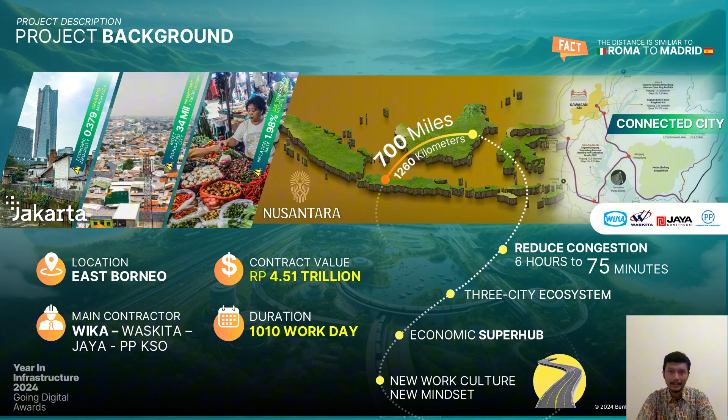This project is not only a construction effort, but also a powerful symbol of Indonesia's unity and commitment to sustainable development. The 3B toll road segment presents both significant challenge and unique opportunity within our unit price contract project.

As global warming intensifies, heavy rainfall poses a substantial risk of slope landslide, particularly in areas with soft soil properties. Additionally, our project must carefully navigate around 10 critical transmission towers along the corridor, ensuring uninterrupted power supply and operational safety.

Furthermore, the segment includes 2 dedicated wildlife corridors designed to facilitate the safe passage of endangered species such as orangutans, monkeys, and proboscis monkeys. This underscores WIKA's unwavering commitment to preserving local biodiversity and fostering an eco-friendly transportation infrastructure.

Former President Joko Widodo emphasized the urgency of achieving commissioning readiness 2 months ahead of schedule, ensuring the infrastructure was prepared for Indonesia's Independence Day celebration in August last year.

This momentous occasion marked the beginning of the initial transfer to Nusantara, involving the completion of critical infrastructure to support the new capital vision of sustainability.

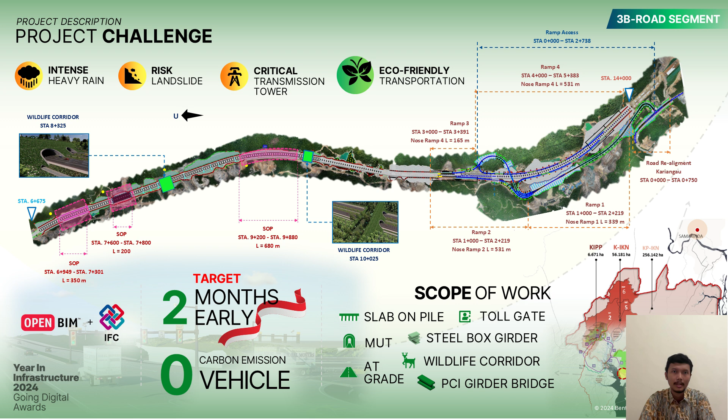Notably, Nusantara is set to be a fossil fuel-free zone, reinforcing Indonesia's pledge to environmental stewardship. This project stands as a beacon of technological advancement and sustainability, paving the way for the next 2 decades toward Indonesia's Golden Vision 2045, which will commemorate a century of independence with a future-ready smart capital.

At the beginning of development, the task force used past authority tools such as closed BIM and CDE hub for all Nusantara work packages. However, the solution is deemed insufficient in achieving Nusantara's vision in the future.

Therefore, we realized that we need an open BIM and digital twin solution to overcome the significant challenge and gain advantage on a definitive solution. So in late 2022...

WIKA identified a key opportunity to use Bentley Open BIM Solution to help resolve this issue and accelerate this project by 2 months ahead, to June 2024.

WIKA initiated an Open BIM strategy to present a solution based on maximizing the strength and specialty of different BIM tools in the smartest way possible.

One notable example, OpenBridge was used to model the full elevated intersection due to being the only efficient bridge parametric solution.

So WIKA encouraged the task force and joint operational team to work based on quality using an IFC standard, as long as it fulfills the project target while maximizing the benefit.

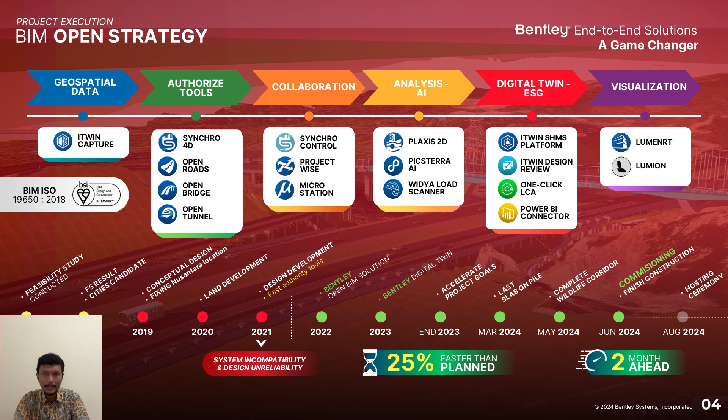The Open BIM methodology supports transparent, open cooperation of all project participants regardless of the software. The digital twins are crucial for accurately reflecting real-world conditions, whether during construction or post-operation maintenance.

For instance, iTwin Capture Modeler was used to process 500 hectares of aerial survey from UAV imagery with LiDAR sensor to speed up volume measurement, giving valuable data for design review and to perform cut and fill operations.

OpenRoads has an industrially accepted method for assessing risk of aquaplaning on longitudinal gradient in the 3B section and roundabout in the national axis, which has some more than 4mm, adjusting the geometry design accordingly.

OpenBridge helps manage massive elevated structure data with its powerful parametric features. To analyze the elastoplastic model for slope protection, we relied on Plaxis 2D.

The team also utilized the integrated Open Tunnel to design and analyze the animal corridor. Then, the federated model was synchronized to iTwin Design Review to run model checking and ensure the model was right before visualizing in LumenRT.

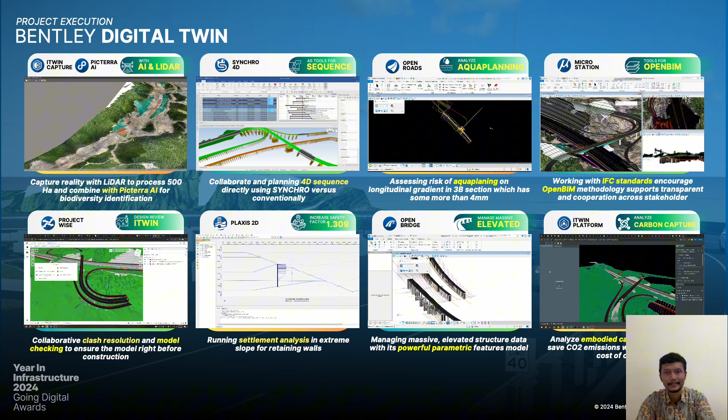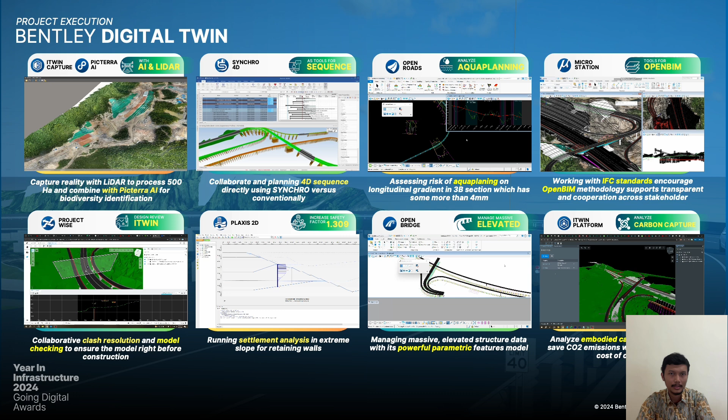WIKA used Widya load scanner as a third party to calculate material volume in real time using a LiDAR scanner, which can calculate volume with an accuracy up to 99% in less than a minute. WIKA also used TopCon, such as an onboard unit and an intelligent compactor, which enables the project team to remotely monitor heavy equipment position and engine status using Sitelink3D web.

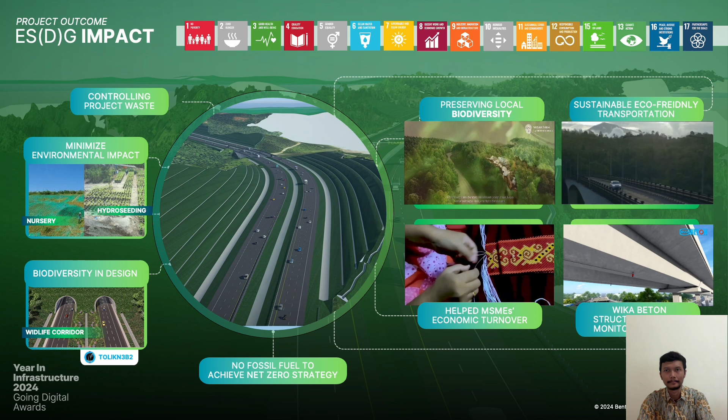WIKA is fully committed to minimizing the environmental impact, preserving local biodiversity, and creating sustainable, eco-friendly transportation infrastructure. A typical passenger vehicle emits about 4.6 metric tons of CO2 per year, so no fossil fuel vehicles are permitted in Nusantara. This highway will adopt charging lane technology from Sweden to allow vehicle charging while cruising the road.

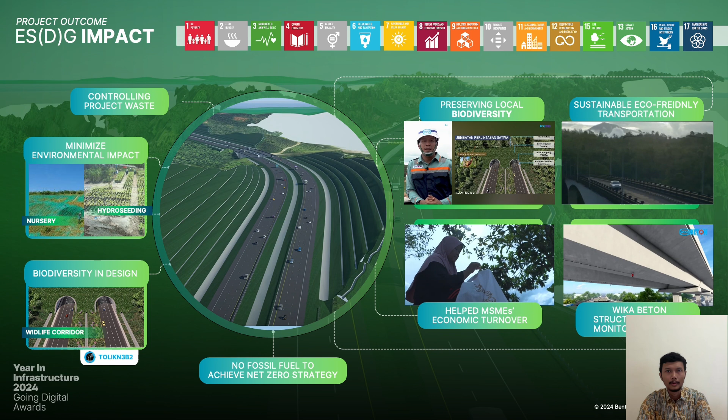The environmental impact caused by massive land clearing for toll road development includes deforestation. WIKA helped carry out reforestation, provided a nursery area, and planted 52,000 trees along the toll road. WIKA also used hydro seeding on slopes to reduce the level of erosivity of the road slope.

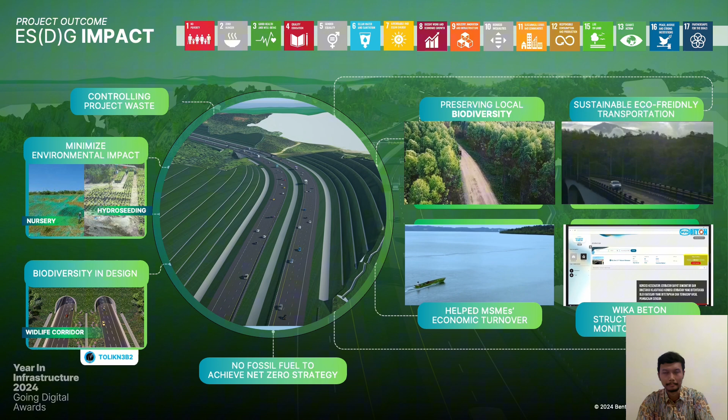Nusantara is an area with high biodiversity and a high endemic level. WIKA pays attention to its impact on the habitat of wild animals and refers to the biodiversity master plan. We use an open tunnel to design animal corridors according to the behavior of existing wildlife.

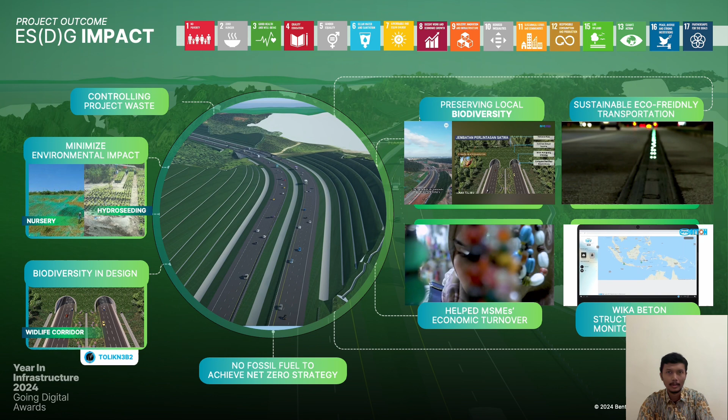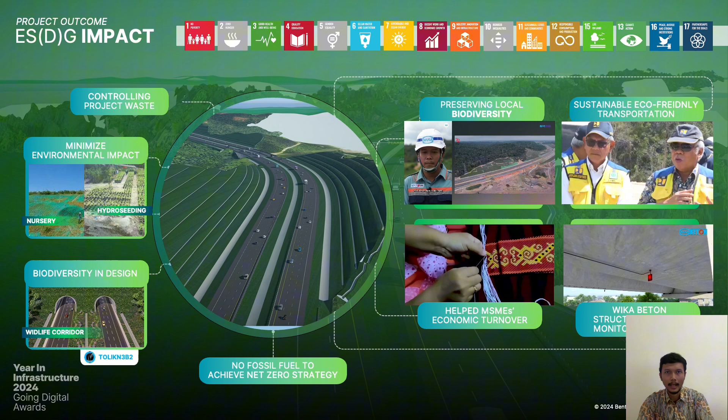The Mahakam River's poor water quality is raising concern about water access in the new capital. A multi-utility tunnel in the access road will ensure tap water is distributed through the pipeline from Sepaku Dam and provide sanitation for all. It is used as an underground utility system for better urban aesthetics, protection from bad weather, easier maintenance, and to avoid sabotage.

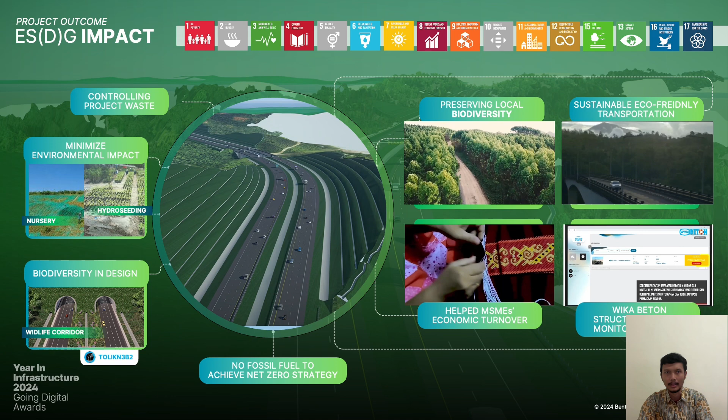This massive construction will encourage the economy through infrastructure investment, push the output of other sectors, and create employment opportunities.

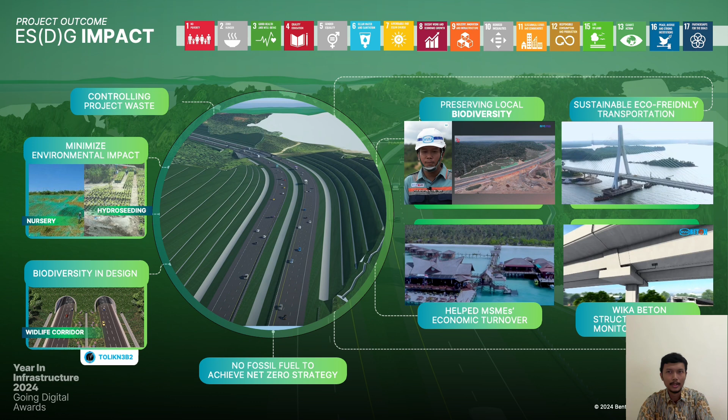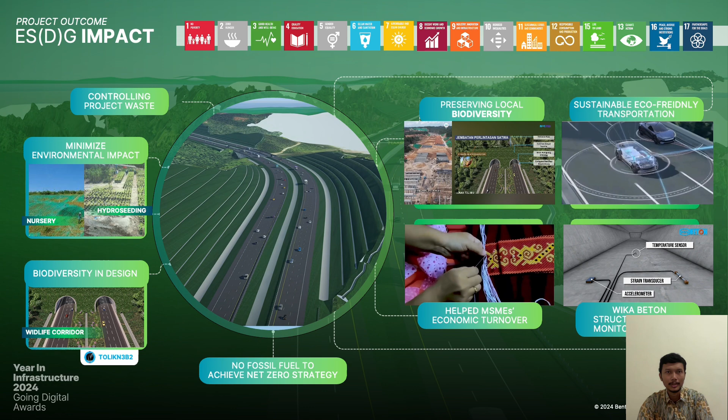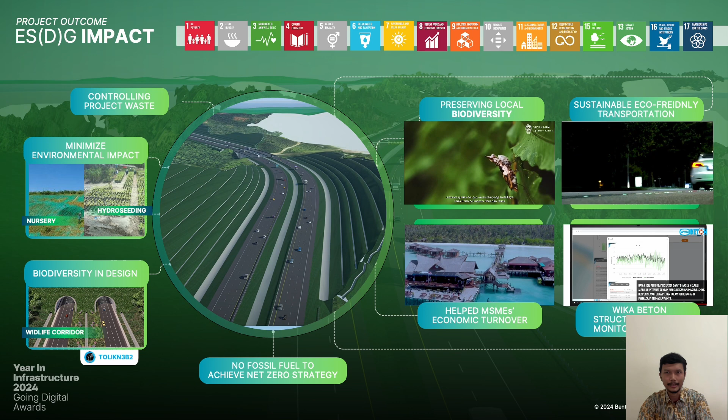Micro, small, and medium enterprises, or MSMEs, along the construction are increasingly feeling the positive impact. WIKA helped contribute to doubling MSME economic turnover and accelerated the economy of East Borneo by about 6.22% above average.

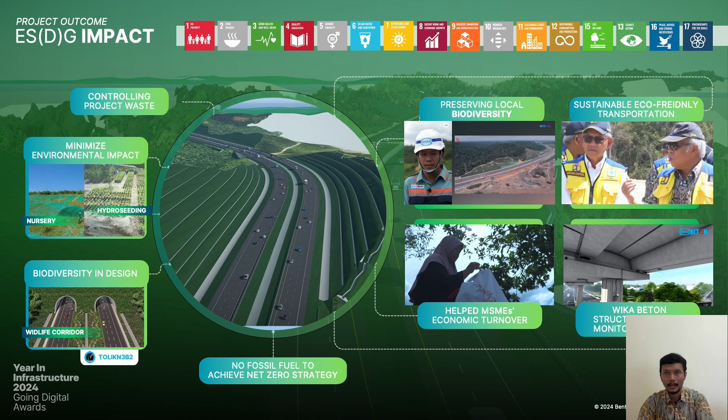Finally, WIKA with its subsidiary WIKA Beton is developing a structural health monitoring system across the corridor for later use in the operation and maintenance phase.

The task force carries out BIM quality control on a bi-weekly basis, so WIKA ensures all models in all disciplines pass the quality checklist sheet. iTwin Capture helps increase the speed, accuracy, and consistency of data processing by 100% compared to traditional surveying.

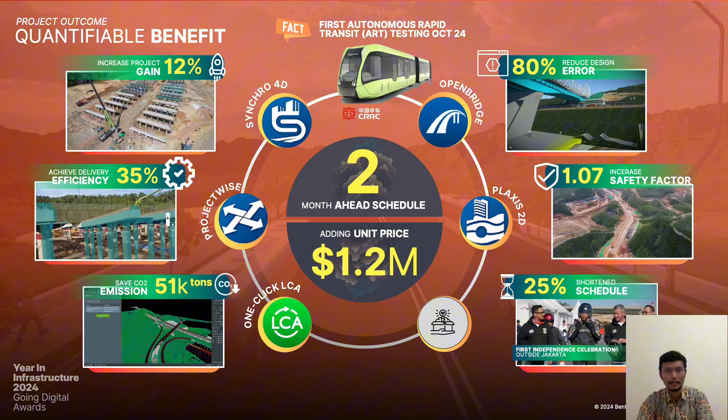Plaxis and OpenRoads facilitate up to 35% faster iteration of design alternatives in slope protection compared to other solutions. The result: we chose the best option combining secant pile, bore pile, and retaining wall.

This result increased the safety factor from 1.078 to 1.309, which fulfilled the residual safety requirement.

WIKA also used more than 23,000 minipile foundations for handling subsoil in several toll road locations. WIKA used WIKA Beton concrete, which utilized Portland composite cement, or PCC, and fly ash as a concrete mixture.

Based on the iTwin embodied carbon calculations, we saved around 51,000 tons of CO2 emissions, equal to $1.6 million in social cost of carbon.

WIKA is committed to minimizing the environmental impact, preserving local biodiversity, and creating sustainable, eco-friendly transportation infrastructure.

WIKA successfully achieved 35% efficiency in construction process delivery while reducing design error by 80%. Bentley OpenRoads Solutions also helped WIKA increase the project's commercial impact in the design review by 12% of the project cost.